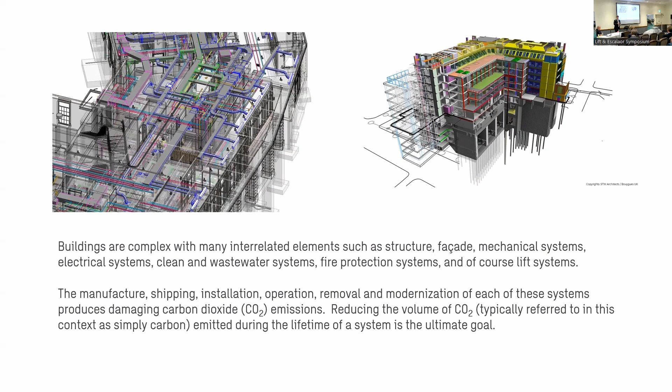And the manufacture, shipping, installation of all these systems produces damaging carbon dioxide emissions. And reducing the volume of CO2 emitted during the lifetime of any of these systems has got to be our ultimate goal. And the environmental engineers will talk about this thing called LCA, life cycle assessment, which is a circle that starts in raw materials, manufacturing, shipping it, installing it, the lifetime of the building or the system, the end of life, and recycling.

And I think we start to then see how that plays into the world that we work in, the lift industry, because we recognize that cycle of raw material manufacture, install, operate, recycle. But where could we start as a lift industry? Well, this piece about carbon, you may be familiar with the term whole life carbon, WLC, and that comprises two fundamental components. The first is embodied carbon. So this is about the materials that you actually create or manufacture. And it's the total CO2 emitted in producing those materials, estimated from the energy used to extract and transport them, as well as the manufacturing process itself. So an important element, embodied carbon.

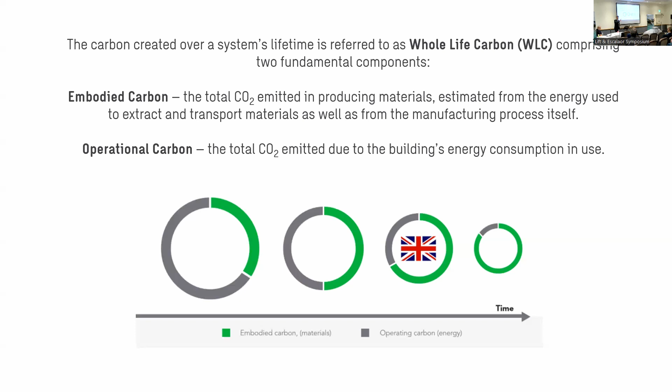And the other piece that we're probably a little more familiar with in the operational side of the lift industry is operation. As the lift goes up and down the building, it is consuming energy. And the graphic on the bottom there kind of shows how, as our systems have got more energy efficient over time, embodied carbon, the green element, has become a bigger and bigger component of the total energy. So both are important for us to think about as a lift industry, the embodied carbon, the materiality of the equipment, plus the operation.

We also have a very useful framework document here in the UK that was published by RICS, the Royal Institution of Chartered Surveyors. And this provides us with a methodology for assessing whole life carbon. And it provides us with a framework as a lift industry to hook into to say, okay, what does this mean for my product? And it talks about operational carbon and embodied carbon. And it creates this idea of expressing whole life carbon as kilograms of CO2 equivalent per square meter.

So in a bigger building, you're going to have more lifts, you're going to have more embodied carbon, they're going to consume more energy. But if you're dividing by the net internal area of the building, you get some kind of quantum measurement. Carbon dioxide equivalent is an important thing. It's not CO2, it's CO2 equivalent. And that's a measure of all produced greenhouse gases associated with the system in terms of the amount of pure CO2 that would create the same amount of warming. Bit of a complex thing, but it's just trying to get apples for apples, I guess.

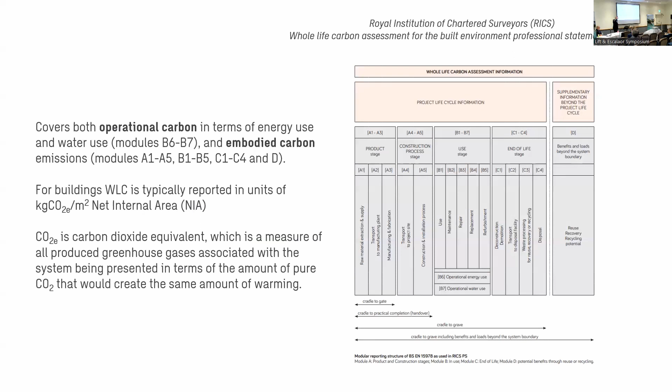If we look at embodied carbon and how the lift industry assesses embodied carbon at the moment, it uses something called EPDs, Environmental Product Declarations. And these are an established framework. It's not directly related to the lift industry. It applies to many, many different systems. And it provides a range of data that includes embodied and operational carbon. It's third-party ratified. It's an independent objective assessment method.

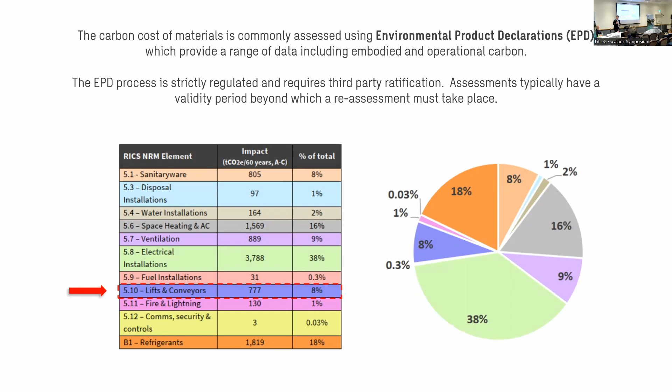Why are lifts important? The data at the bottom here is for one of the projects that we've been working on in our business. And you can see lifts and conveyors, escalators, are there 8%. So it is significant. And it's something that we need to focus on as an industry. And actually, talking to our environmental engineers, I was a little surprised when they said the lift industry is actually quite good at this, EPDs, better than some other industries, particularly lighting was quoted. And I would have thought lighting would have been way ahead, but no, apparently not. The lift industry has made great steps in terms of producing EPD data and publishing it.

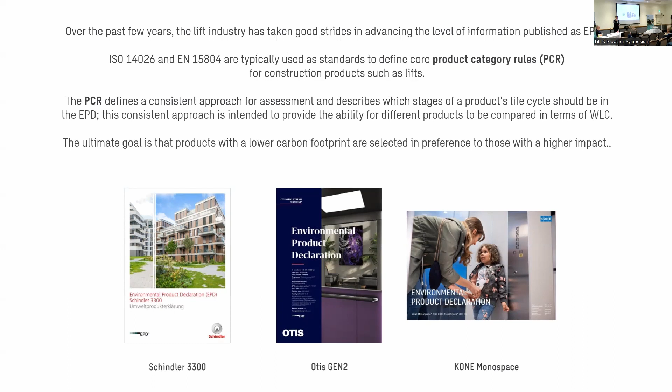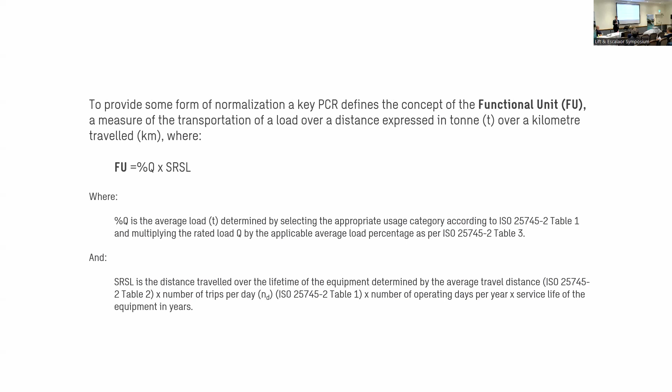You can see there that it talks about particular processes that involve PCRs. And PCRs are a way, again, of trying to get an equitable way to assess EPD data. And in order to do that, it talks about this thing called a functional unit. And the functional unit is expressed there and is related to the load of the lift, plus some other elements such as the distance traveled, the number of trips per day, and the life cycle.

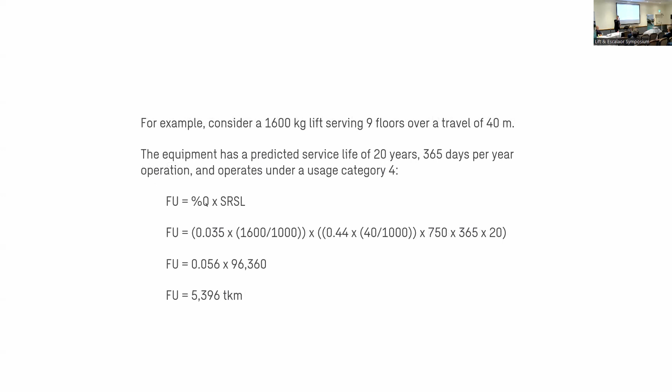And here's an example of what a functional unit calculation would look like. So if we took a 1,600 kilogram lift serving 9 floors over a travel of 40 meters, and if we assumed it had a service life of 20 years, operating 365 days a year, then our functional unit comes out to 5,400 ton-kilometers. So this is supposed to be an assessment to allow us to compare and contrast different lifts. When we actually try to do that, it starts to become a little bit problematic.

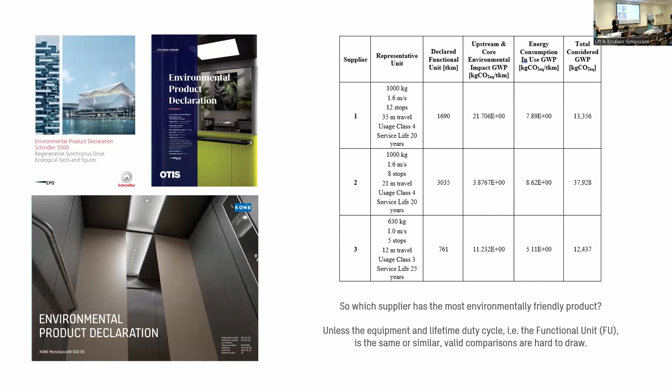And I don't quite know how to address that at the moment. There may be others in the audience that we can talk to over the next 2 days. I'd be really interested. I need to get moving.

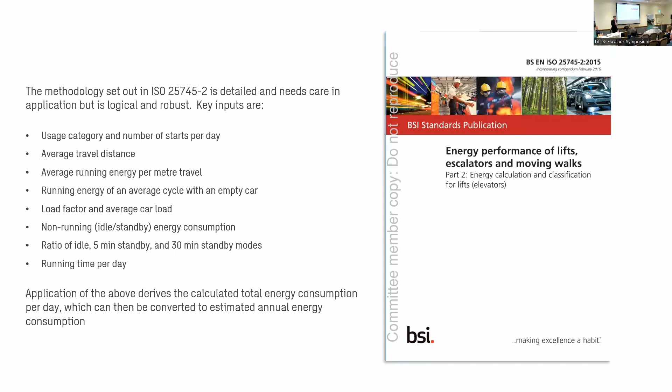Operational carbon, the second element. So it's key that we've got the ISO for assessing operational energy. I'll fly through this; we can talk a little bit more. It's a robust, established method, but it is quite simplistic by necessity. It applies to single lifts. It doesn't pick up regenerative drives. The actual standard references the fact that this may be up to 20% inaccurate.

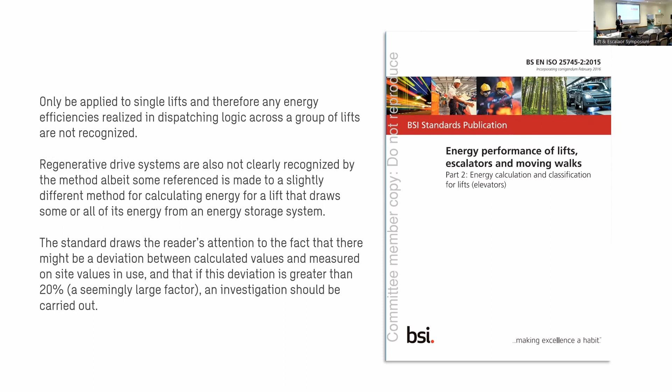So all of a sudden, we're trying to predict and forecast actual energy consumption, and we've got a method that recognizes the fact that it is a mathematical assessment method that may be up to 20% inaccurate. It seems a bit strange to me. It doesn't really talk about number of days. It's independent of demand. And therefore, for me, it feels like it's not as real world as maybe it could be.

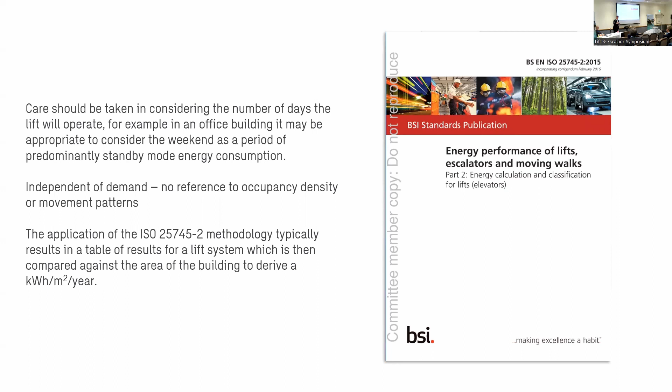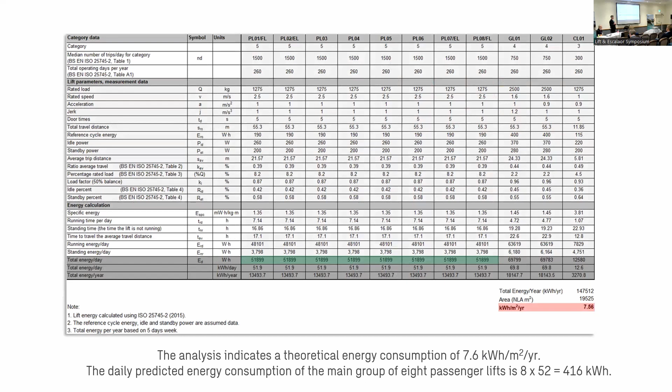What it does allow us to do is this kind of assessment. So this is an example of a real project where we've got an assessment of theoretical energy consumption based on the ISO methodology. And you can see the number in the bottom right-hand corner, which is 7.6 kilowatt hours per square meter per year. So this is the base assessment of the operational energy of this system. Now, if we look at the 8 passenger lifts in this building, the green highlighted numbers, total energy consumption per day there is around 400 kilowatt hours using the ISO methodology.

There's another way, though, that it feels to me we really ought to be exploring as an industry, which is to simulate it. We've done some calculations here utilizing Marja-Liisa's proposed full-day demand template. So you can see in the top right-hand corner a demand template of incoming and outgoing traffic. We've got some electrical data here, which starts to pick up things like idle power, standby power, and regenerative drive according to the balance of the car, whether we're actually regenerating or consuming energy.

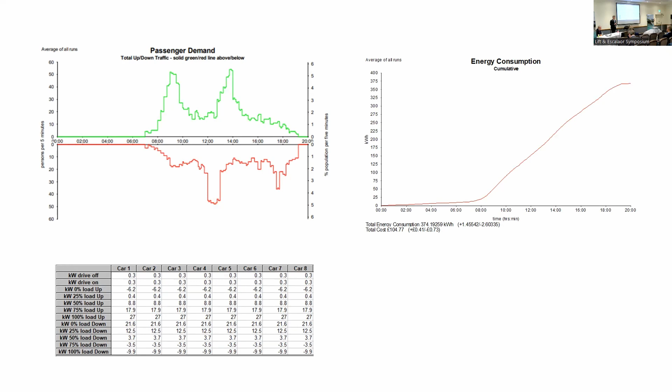And that can produce for us an energy consumption graph for the system, the 8 passenger lifts operating as an intelligent destination control group. And that total energy consumption number there, apologies, it may be a bit small, is 375 kilowatt hours. So a significant reduction from the ISO. Whether one is better than the other, I'm not sure yet, but I do think we need to start discussing it as an industry and trying to refine and improve where we're going in terms of the accuracy of energy consumption. I think there's a clear need to focus on it.

I think we've got some assessment methodologies available at the moment, but drawing robust conclusions is challenging, particularly in EPDs. Talking to our environmental guys, they talk about the need for EPDs to have a greater range, but if we look at the lift industry and the sheer plethora of different configurations of lift equipment we can get, that's going to be really challenging. But whether there's a way of being able to derive EPD data from some fundamental milestone configurations that allows us to say, if that's the EPD for 1,000 kilograms at 6 floors, what's it going to be for 1,600 kilograms at 15 floors? Because at the moment, they're selecting non-representative EPD data for these energy models.

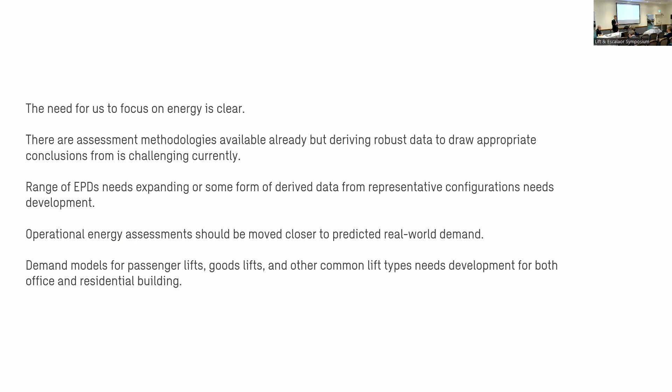I think the operational energy assessments could be moved closer to predicted real-world demand, and maybe we're going to hear something about that from Dr. Peters in a moment. When we've talked about demand models for passenger lifts, and there's a bit more in the paper about this, yes, that's for passenger lifts. What's a demand model for a goods lift? What's a demand model for a firefighter's lift? I think as an industry, we need to develop those and agree a consistent approach.